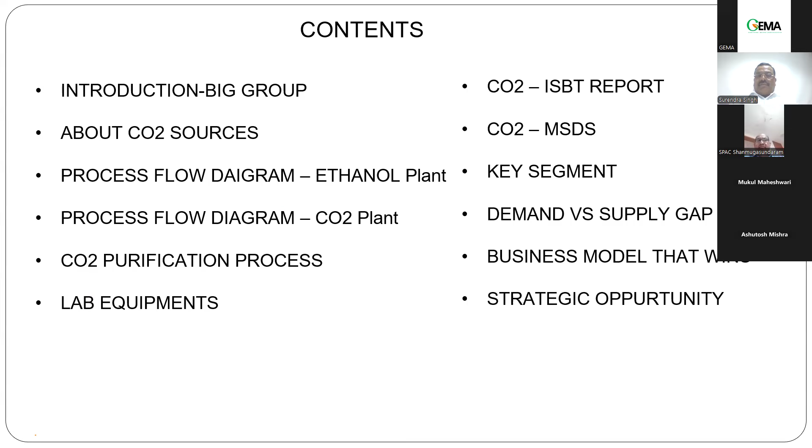So let us go to the first slide. About Big Group - though most of the team members already know about Big Group, however I'm just giving a brief idea. It's a dynamic and fast growing leading player in industrial gases and plant equipment on a pan-India basis, expanding globally. The core specialization of the group is manufacturing and supply of industrial gases, with a major focus on the carbon dioxide business. We have end-to-end capabilities in engineering, procurement, commissioning of plants, integrated solutions.

The group has a strong, robust logistic system. We have a very strong technical and operational team as per industry requirements. Currently, we are serving various segments, however we majorly serve the chemical sector. It includes fertilizer, food and beverages, healthcare, automotive, and infrastructure. Commitment to excellence - we are focusing on operational efficiency, safety, and customer service.

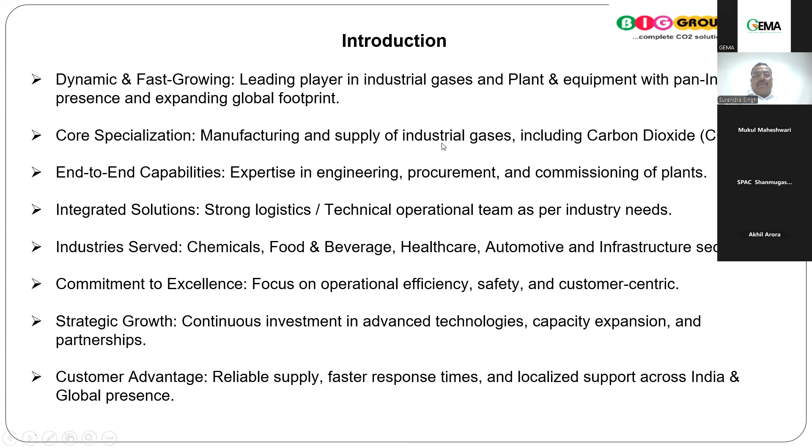Now I'm giving the example details about CO2. No doubt, grain is the major contributor in the current scenario. However, if you go through the previous years, at that time we were getting CO2 from the fertilizer base, or prior to that, I can say the molasses base, sugar based CO2, and it was having a lot of challenges, as well as we were having the fertilizer based CO2 generation.

Combustion is also a major contributor, and some Indian regions are still getting unreliable supply or generation of CO2 from this process. However, the entire industry has shifted from this area - I mean to say combustion, fertilizer - to grain based. Why is it grain based? There was a lot of unreliability in the other processes. So grain is the major contributor in this case, and the market is having sufficient carbon dioxide.

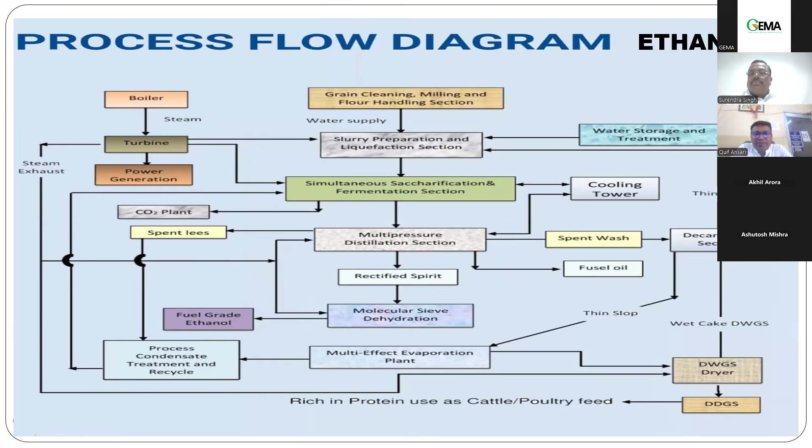So as we can see from this slide, how ethanol is being generated through the grains, we have a boiler, turbine power, and in this process, as seen in the earlier slide, we can see how CO2 is being generated as a byproduct. So for every mole of glucose, we get 2 moles of ethanol and 2 moles of carbon dioxide. So this is the overall scenario of what we get from ethanol production.

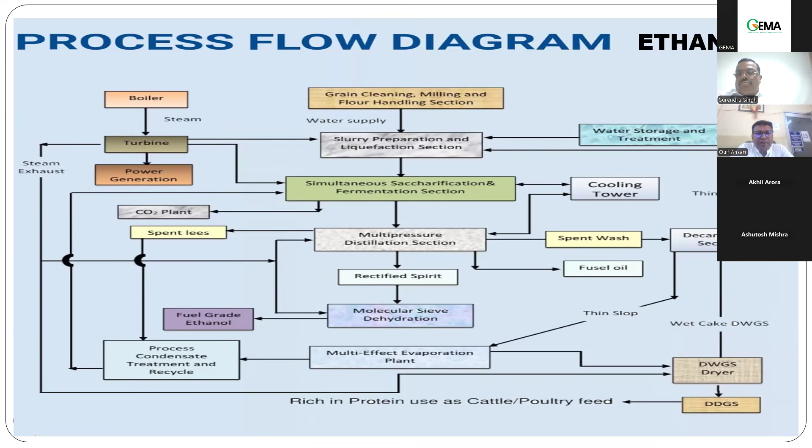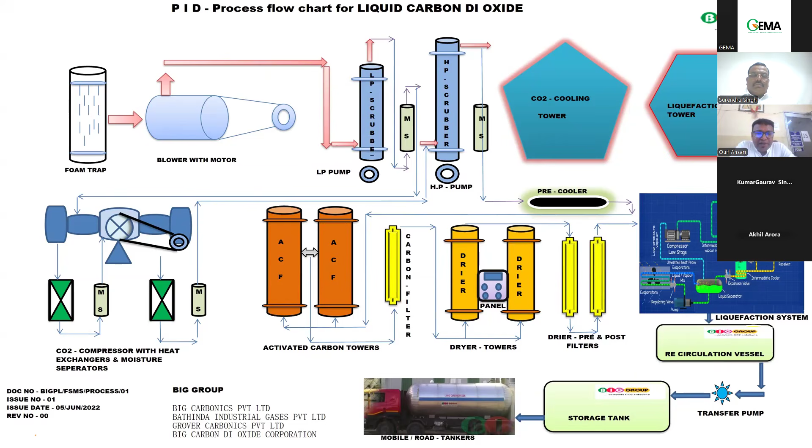Then we have the NOx tower, an additional thing where we remove the NOx compounds coming in the gas. Then we have the RV tank, then the storage tank, and the liquid which has been generated dispatches to the mobile tankers, as we can see. So the whole scenario is covered under SOPs, processes, and quality control. A robust quality control system is in place.

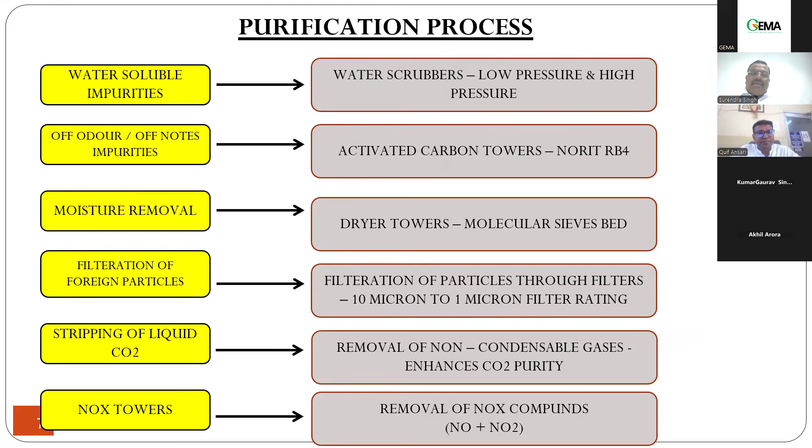So in this slide, we can see the laboratory equipment required to process a quality product for food and beverage grade. On the left hand side, you can see an online analyzer approved by Coke and PepsiCo, used to monitor the impurity level of the gases present with 24/7 monitoring, giving readings at ppb levels. The ISBT requires hydrocarbons, acetaldehydes, methanol, benzene, sulfur, all those compounds to be addressed with 24/7 monitoring. Otherwise, the product will fail into its category and we won't be able to supply it as food and beverage grade.

So a robust quality system should be in place to manufacture and recover liquid carbon dioxide. On the right side, we can see a SCADA diagram of the plant, showing how it runs 24/7 in continuous online auto mode, with all alarm systems in play, so autonomous bodies play into that. Then we have gas chromatography to identify the raw gas levels and impurity levels on the higher side. So these are the basic requirements to run a CO2 plant for good quality products, sir.

So this slide consists of safety measures and PPE which are a must in a liquid carbon dioxide industry. As we all know, liquid carbon dioxide is at minus temperatures, and it needs to be handled with great care. Cryogenic gloves are required, goggles required, safety equipment are all a must to be adhered to in the production area. Eye and face protection should be there. Otherwise, the liquid CO2 generated in the production area, being at very high pressure, can cause damage to your eye and face if not handled properly.

So safety is always a must along with a quality product. That's our motto, to manufacture liquid CO2 consistently. Then, if any extraction or leak is there, we all know CO2 is an oxygen-replacing gas. So any area where we find or feel CO2 is leaking out, it should be addressed properly, otherwise it will affect anybody in the surrounding area. For that, we have SCBA kits located in all manufacturing areas, and training should be given regularly so people are aware of how to use the kits.

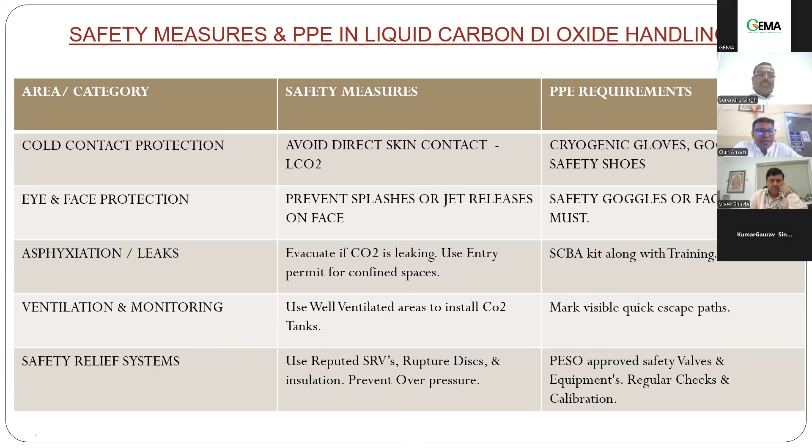So once the liquid CO2 has been generated, testing should be done. This is a sample ISBT test report, from the International Society of Beverage Technologists, covering around 100 parameters in the liquid CO2. All these parameters should be tested. It can be half-yearly or yearly depending on customer requirement, but it's a mandatory requirement when supplying to food and beverage companies.

Next slide. Mr. Ansari, I'm excited to share something over here. It is very important since we are using this CO2 in the beverages segment, and it is directly connected to the public. So it is very important, and worldwide there are only two labs, one in the USA and one in Thailand. It is very mandatory to test your CO2 quality for these parameters.

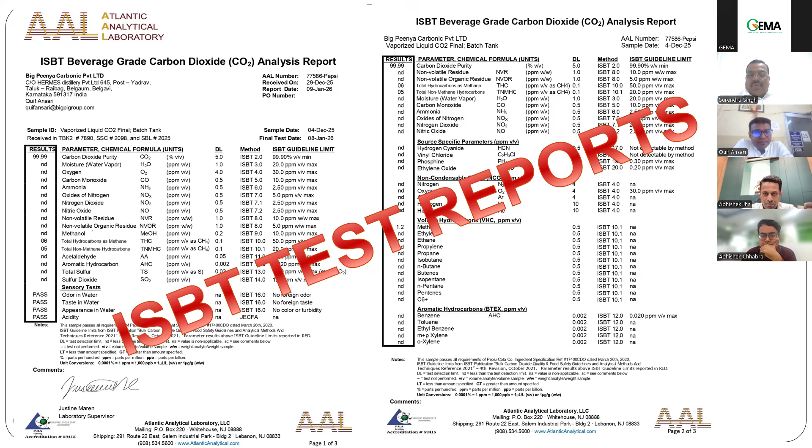All over India, all over the world, only two labs are approved by Coke and Pepsi, sir. One lab is in Atlanta, USA. Another lab is in Praxair, Thailand. These two labs are the only ones authorized by Coke and PepsiCo to test CO2 for all the parameters listed by ISBT. Whenever beverage companies like Coke or Pepsi are approving any CO2 manufacturing facility, these are the mandatory parameters. Based on that, they move forward.

Coming to this slide, it talks about the material safety data sheet of liquid carbon dioxide, how to handle it when it gets expelled, inhaled, or if any injury or mishappening occurs with liquid CO2. One should be aware of how to handle liquid CO2 appropriately. This should be displayed. We have displayed it in all mobile tankers transporting liquid carbon dioxide, and in the plant manufacturing and production area, so that everyone is aware of the effects of liquid carbon dioxide when it comes in contact with a person. This should be made public for awareness purposes.

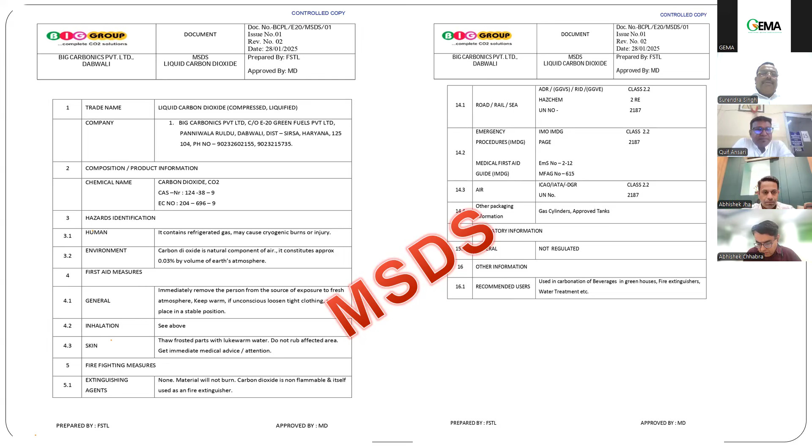Now I'm sharing the holistic demand of CO2 over here. Where is CO2 used? The major contributor is food and beverages, for preservation purposes, a major contributor over here. Then the next segment is welding and fabrication, majorly in automobile, which are major contributors for CO2.

Excuse me, sir, sorry for the interference, but your voice is very low. Can you please speak a little louder, or come closer to the system? Am I audible now? Yes, sir. Now you are audible, this is much better. Thank you, sir. Right, thank you.

Should I repeat from the beginning of this slide, or should I continue? Please repeat from the beginning, sir. Yes, yes, sure, sure, sure.

So I'm sharing the key segments over here where CO2 is used. The major segment is food and beverages. In food and beverages, no doubt, Coke and Pepsi are major contributors. However, a lot of local cola manufacturers are also available, and they also have major requirements. The next segment is welding and fabrication, where automotive is a major contributor.

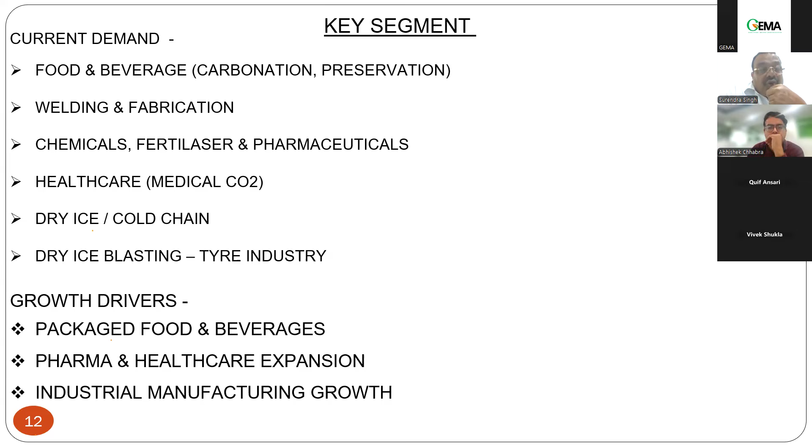Growth drivers. If we talk about the growth drivers, packaged food and beverages is a growth driver in coming days. The way consumption of packaged foods is increasing, I'm sure CO2 consumption will be more over here.

The next is pharma and healthcare expansion. Here, there would be a good requirement. This segment is growing gradually in India. Industrial manufacturing growth is also a growth driver, and it will support the CO2 demand.

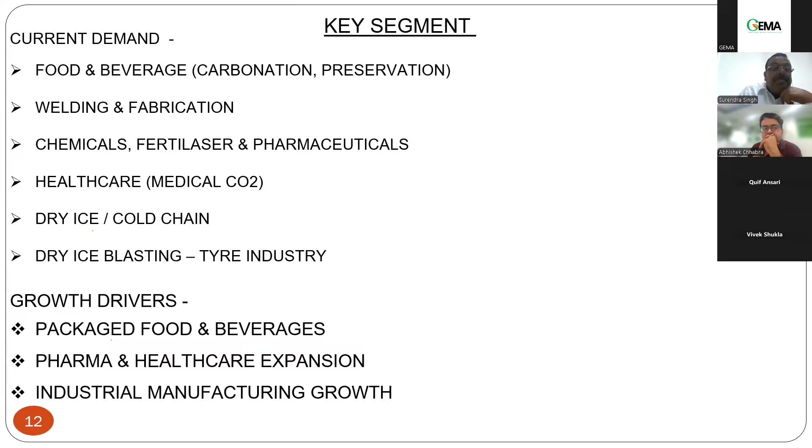Demand and supply gap. It's a very important slide here. Physical CO2 versus captured CO2 is a challenge right now. There is surplus CO2 available in India, but converting it into the real world is a gap that we have to discuss.

Captured versus usable CO2. We have availability of CO2 at many regions in India. However, there is a shortage in certain areas or regions, which I will share in the next slide. This creates a paradox: India has excess CO2, but there is a shortage in the market of finished CO2.

The major point is lack of quality CO2 plant and equipment. Like we are emphasizing on our process, everything, but sometimes we are compromising on our CO2 plant and their related equipment.

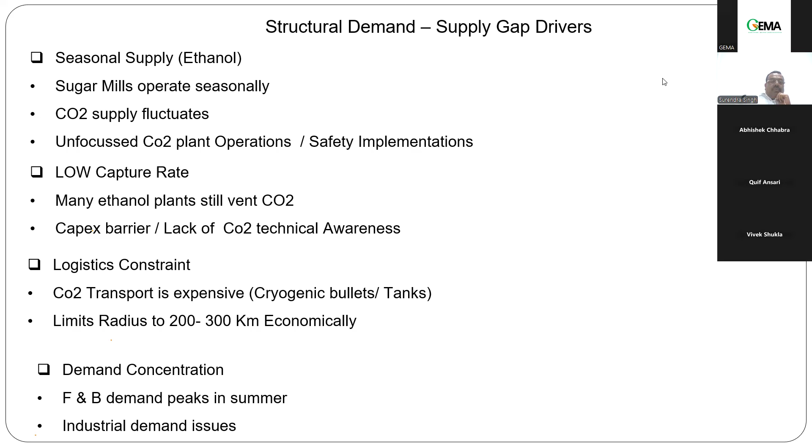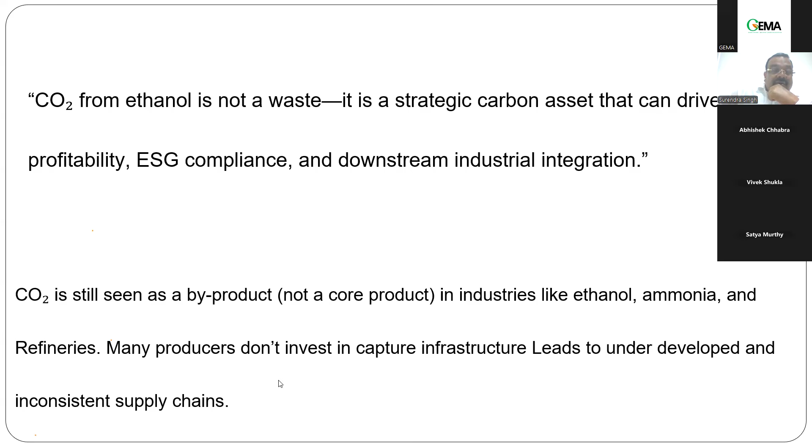Again, I am sharing the same thing. It is not a byproduct, and though it is still seen as a byproduct, in industries like ethanol, ammonia, and refineries, many producers don't invest in capture infrastructure. It leads to underdeveloped and inconsistent supply chains. So, this is the major detail I have shared.

If you have any question, I will try my level best to answer.

Question: can you explain the difference between the CO2 generated on a molasses plant and a grain plant based on the application? Specifically regarding quality, and can the same CO2 from molasses or grain be used in the steel sector or industrial segment?

Thank you for your question. Molasses-based plants face severe challenges in terms of reliability during certain periods of the year when the plant is shut, due to various reasons like climate, government restrictions, or environmental issues. The system totally depends on the cane crop.